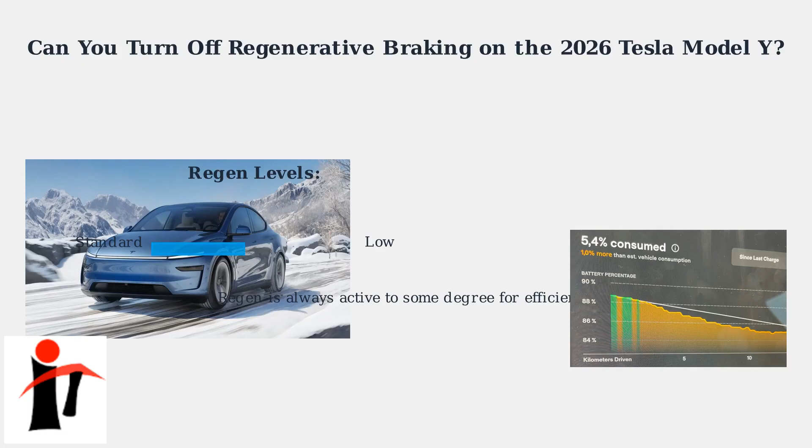Can you turn off regenerative braking on the 2026 Tesla Model Y? The short answer is no. You can't completely turn off regenerative braking. However, you can minimize it significantly.

Tesla's system is designed to recover energy during deceleration, improving efficiency. While a complete shutdown isn't possible, you can adjust the regen level to achieve a more traditional braking feel. As of late 2025, the latest software updates have refined these controls, but the core principle remains: regen is always active to some degree.

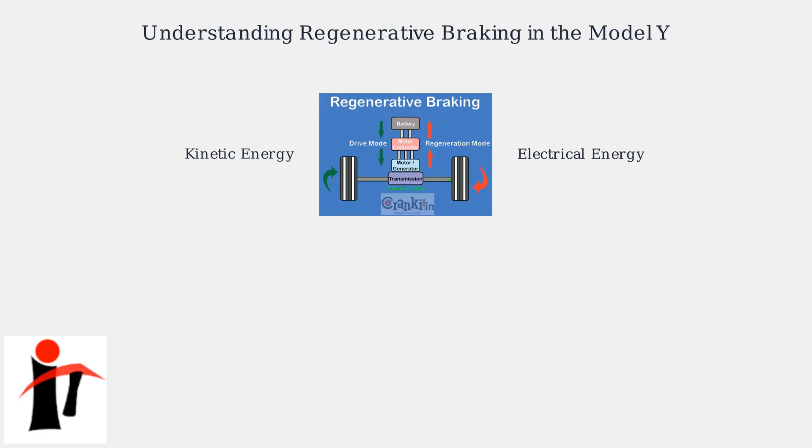Regenerative braking in the Tesla Model Y converts the car's kinetic energy into electrical energy that gets stored back in the battery. This happens automatically when you lift your foot off the accelerator pedal. This process is similar to how kinetic energy from pedaling a bicycle can power lights, showing how motion gets converted into usable electrical energy.

The Model Y offers 3 adjustable regen levels: standard for maximum efficiency, medium for balanced performance, and low, which minimizes the effect for a more traditional driving feel. Selecting low minimizes regen, allowing the car to coast more like a traditional gasoline vehicle, though it doesn't eliminate regen entirely. The system is frictionless and automatic, recovering energy without traditional brake pads.

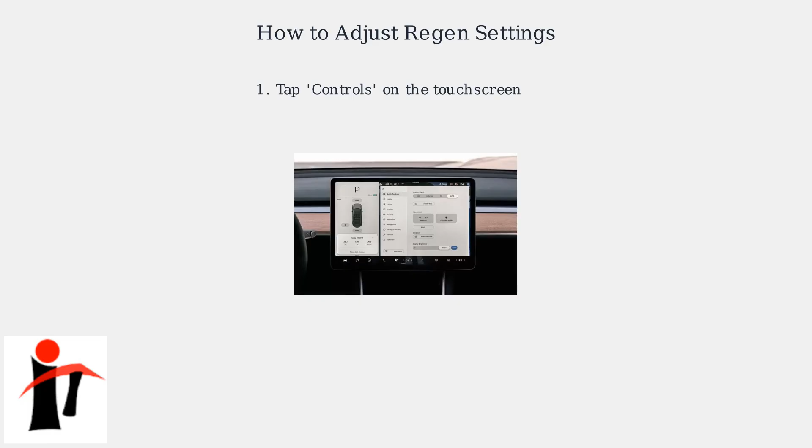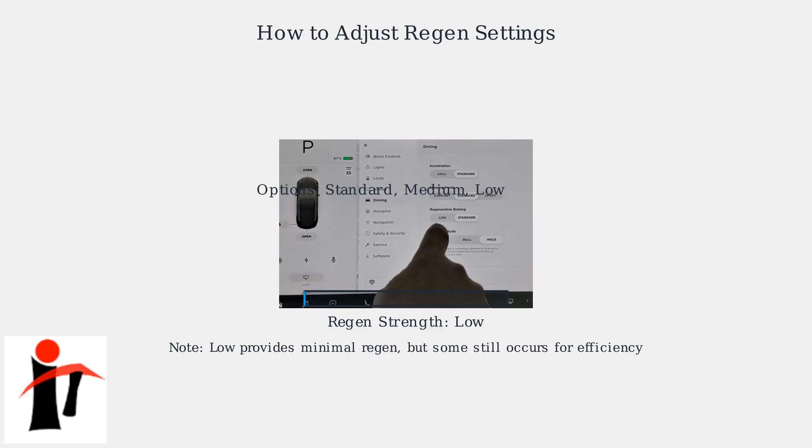To adjust the regenerative braking settings on your Model Y, start by tapping the touchscreen. Navigate to the Controls menu, then select Driving. From there, choose Regen Strength to access the options. You'll see 3 options: standard for maximum efficiency, medium for balanced performance, and low for minimal regenerative braking. Selecting low will give you the least amount of regenerative braking, providing a more traditional driving feel. Remember, even on low setting, some regenerative braking still occurs to capture energy and maintain vehicle efficiency.

Tesla introduced the smooth braking feature in 2025 software updates. This mode reduces aggressive regenerative braking, providing more linear deceleration that feels closer to traditional hydraulic brakes. To enable smooth braking, navigate to Controls on the touchscreen, then select Pedal and Steering, and toggle the feature on. This setting works best when combined with low regen strength.

Regenerative braking is integral to the efficiency of electric vehicles like the Model Y. Completely disabling it would significantly reduce the car's range and energy recovery capabilities. The low setting is a compromise, allowing for a more familiar driving experience while still maintaining some level of energy recapture. Tesla prioritizes efficiency, so a total disable option is unlikely.

Many Model Y owners find the low regen setting particularly useful when towing a trailer. It reduces jerkiness and improves stability by minimizing regenerative braking force. Similarly, when using autopilot, smooth braking combined with medium regen can provide a more comfortable and predictable driving experience. This prevents abrupt decelerations that can feel unnatural during autonomous driving.

Experiment with these settings to find what works best for your specific needs and driving conditions. Each scenario may require different regen configurations for optimal comfort and safety.

The electric vehicle industry is rapidly moving toward greater driver customization options. As technology advances, drivers are gaining more control over how their vehicles behave, particularly with systems like regenerative braking. Future software updates for the 2026 Tesla Model Y may introduce even more granular control over regenerative braking strength. Drivers could see finer adjustment options beyond the current standard, medium, and low levels.

There are rumors circulating in Tesla's beta testing communities about a potential regen off mode that would completely disable regenerative braking. As of December 2025, this feature is not available in production vehicles and remains speculative for future releases. In the coming years, expect to see more AI-driven adaptive regenerative braking systems. These intelligent systems will automatically adjust regen strength based on your driving habits, road conditions, and even weather patterns to provide the optimal balance of comfort and efficiency.

Safety is paramount when adjusting regenerative braking settings on your Tesla Model Y. Always test any new regen configurations in a controlled, safe environment away from traffic. Be aware that changing regen levels significantly impacts your vehicle's handling and braking behavior. The Model Y's dynamics are designed around regenerative braking, so adjustments can alter how the car responds to deceleration.

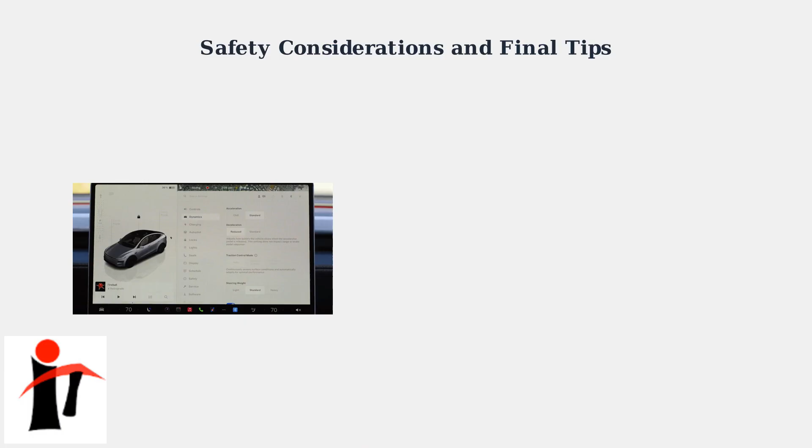If you're used to the aggressive regen of standard mode, switching to low will feel different. You may need to apply the brake pedal more frequently to achieve the same stopping power, as low minimizes regenerative capture.

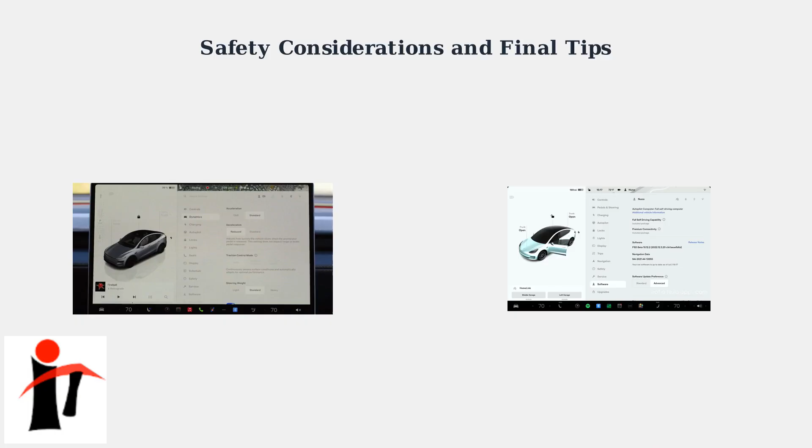Continuously monitor your driving habits after adjustments. Regularly evaluate how the settings affect your comfort and safety, and make further changes as needed to maintain optimal control of your Model Y. Finally, keep your Tesla updated with the latest software releases. Tesla frequently improves regen systems and adds new features through over-the-air updates, ensuring you have access to the most advanced and safe driving options.